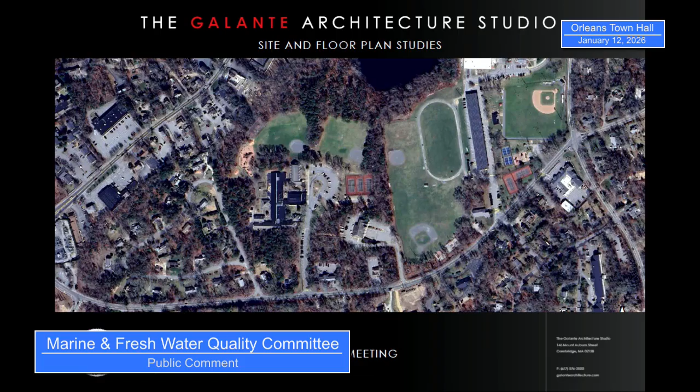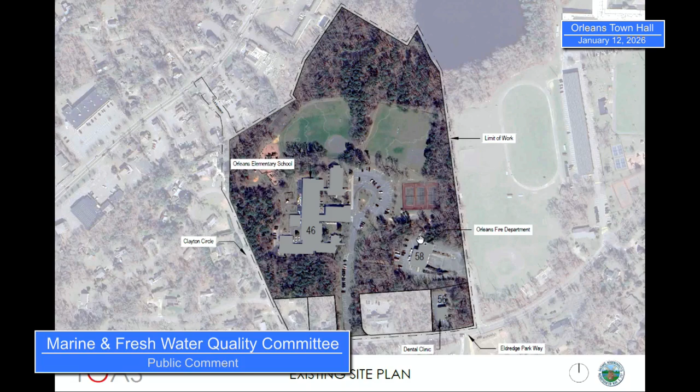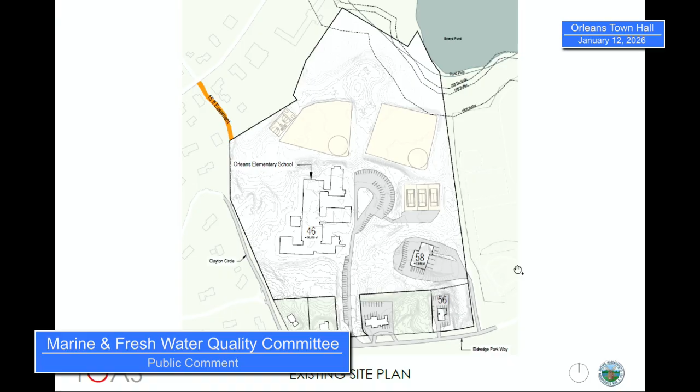So we know that the site plan encompasses this area, right? The former dental practice is here, the fire rescue facility is here, and the rest of the site is school related. Here it is in the abstract with the 56 Eldredge Parkway, 58 back here. And this access road nudges off the site slightly.

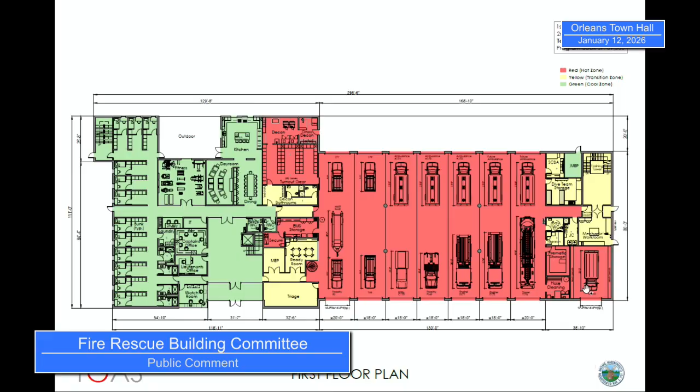So the building size we're working with is what was established during the feasibility study - it's roughly 40,000 square feet of building that we need. And so you see that there's a 3-story option. You're going to see a couple of 3-story, I wouldn't even call them options, 3-story studies and 2-story studies. So this is 3-story study number 1.

This is set back from the road a fair amount, which is what we need to get fire trucks off of Eldredge Parkway safely so they can come in or out, to turn around, to get back into their building safely.

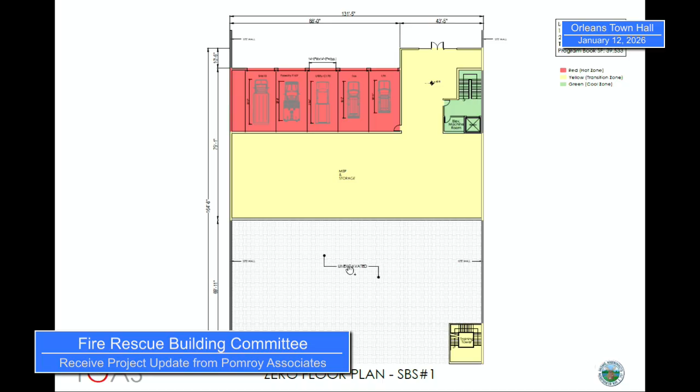This is unexcavated because it is, and this is the training tower. This unexcavated is below the apparatus vehicles that are in here that are necessary to get out toward Eldredge Parkway this way. The red zone is all what's known as the hot zone.

Yellow is the transition where we have to have a mechanical buffer between the green zone and the red zone. The green zone is living quarters, and to make a fire station healthy for firefighters so that they can have nice, healthy, long lives, we create a green zone, transition zone, and a hot zone.

So living quarters, entrance to the building is here off of this bridge concept, and then living quarters would all be in the green zone. There's some transition spaces in between, and then the red zone. Second floor would all be office, command staff, training, etc., all up on the upper level.

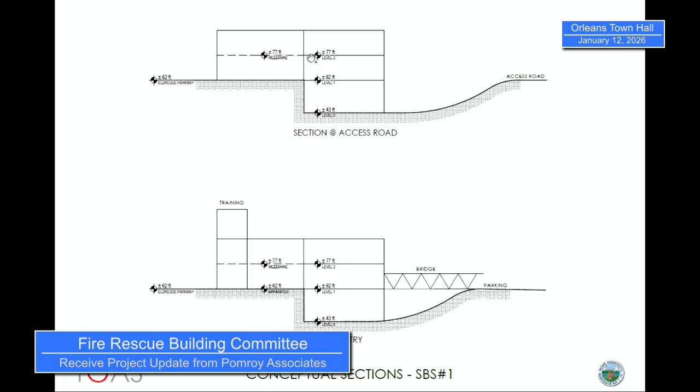So conceptually, parking is here. The building, the property dips down to here, and so we have level 0 down low. Level 1, Eldredge is roughly this elevation at 62, and then the second floor is up here. And then we need to get across that thing.

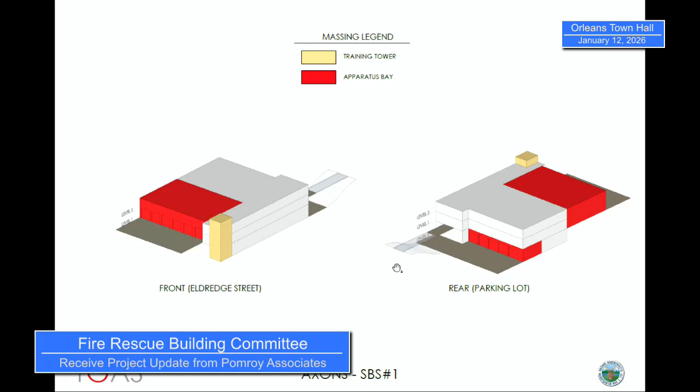So this is one site study. You understand that the building massing is conceptual because we're working on site studies mostly. This is facing Eldredge. This is facing the parking. That's the bottom, level 0. This is level 1. And then the living quarters is up above that with a little bridge in between. So that was one study, and we can go back and revisit these.

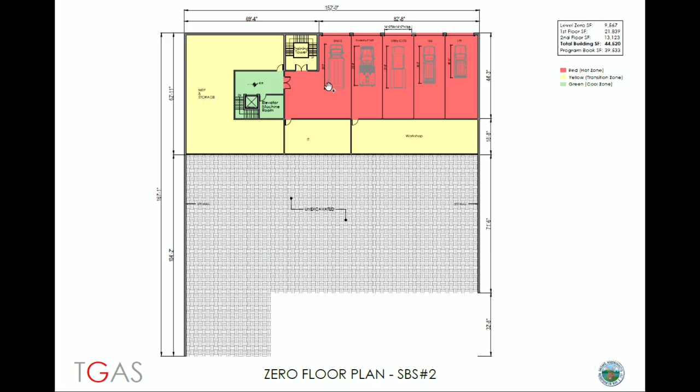Level 0, same thing, down low. Training towers in the back of the building. There's the training tower, living quarters on the first floor, entrance on the first floor, and the red zone, the hot zone where vehicles can go out onto Eldredge, frontline vehicles. Second floor is all living quarters, office space up above.

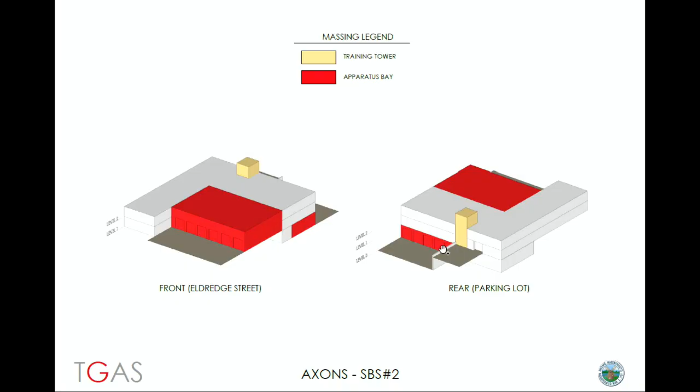The massing starts to look something like this. On Eldredge we see apparatus bays, 6 bays, 2 levels. In the rear, the building is kind of bifurcated with a retaining wall, entrance here, training next to it, and a lower level where second line vehicles are.

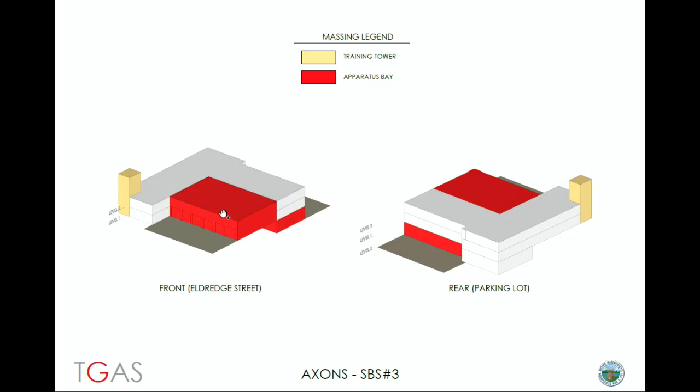3-story number 3. Similar concept to what you just saw: training tower in the front, vehicles facing Eldredge, a set of vehicles here that turn around and head out that way, and the construction entrance with the same kind of ramping system. Lower level, very similar. Upper level, very similar. The second floor is along the back of the building, not the front, so the massing would be a little different with the second floor along the rear.

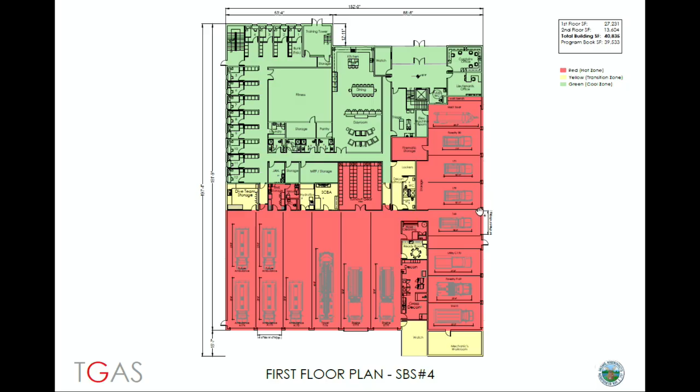Second floor is all of the office space back in this area. And I'm not sure if I said it on the previous one, but the training tower's up on that side at the rear of the building.

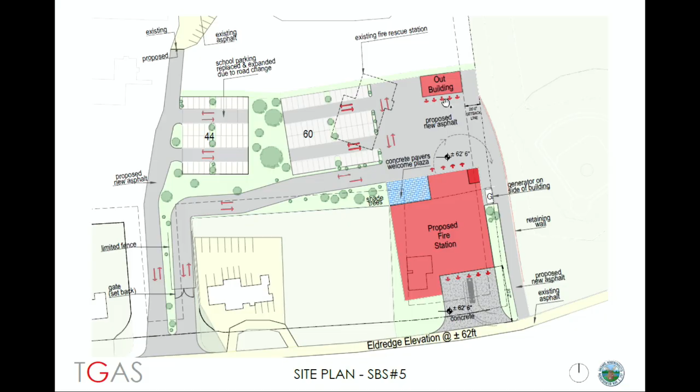There's a training tower in the back. There are some bays back here that are at the same level, level 1. We're also leveling the whole site in this scenario. We can drive our vehicles out that way or out that way. Construction entrance on that side, parking in the back, outbuilding for other vehicles.

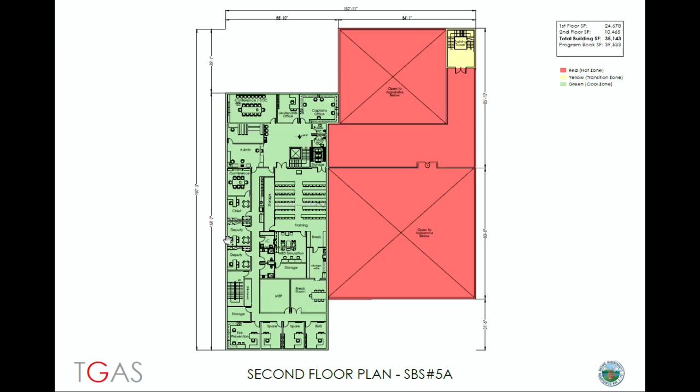Second line vehicles back here on these bays, training tower in that corner, and then office space up on this side with a mezzanine over to a training tower.

This is an alternate with the same first floor plan, but the offices at the rear of the building as opposed to coming along the side of the building here.

Those are some of the things that we're working on with Tim Gula and Chief Daring, thinking those things through, making sure we have the function working out properly, and I think we're in good shape as that unfolds.

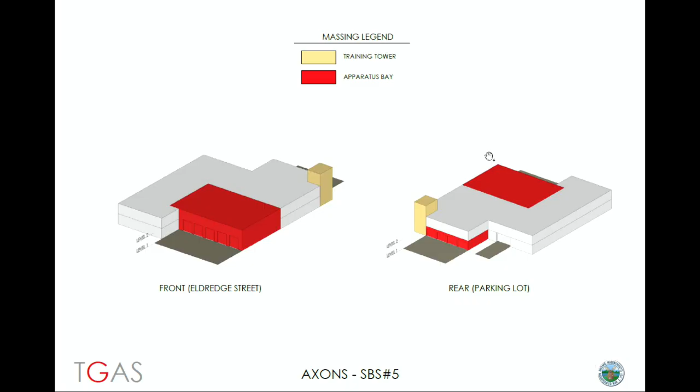This is what the building starts to look like with the massing, not the building, but bays across the front, the access road that way, and then bays in the back over here. This is the access roads on that side to that area.

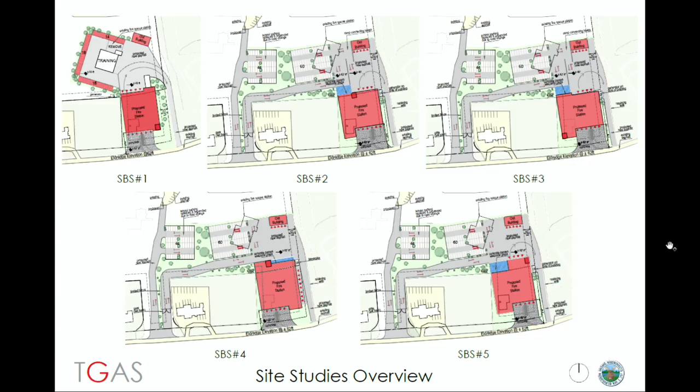That I'm going to open for discussion at this point. Quick question.

I'm just thinking, without looking at all the stuff happening in the rear of the building, right, how tight the site is, yeah, all of the different things that you have here.

The first thing that comes to my mind is if we can't run new sewer along Eldredge, we either have to use that easement out the back or do a septic. There's some land up in there - it might be harder to see on these slides, but right now the building is here and the fire department is using land up into the back here a little bit. So there is some space back in this area that is not settled. But I think utilities will have an impact once we start to get direction and land on a site plan.

So Ted, with the concepts that more or less create a level site, have you given thought to maintaining and using the existing fire rescue building and access? Yes.

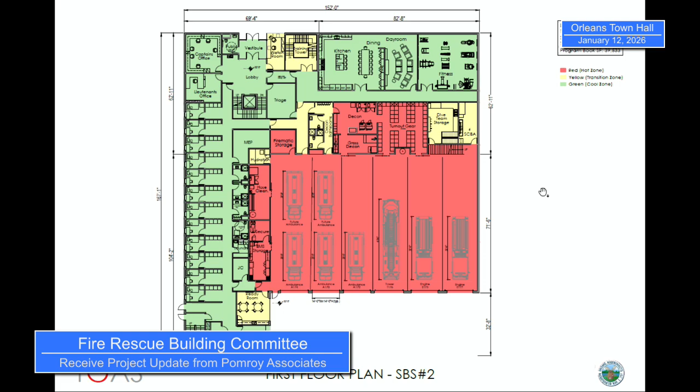Mark? Ted, if you just go back to where you show that one, that's fine.

The access road for construction, and then with the potential of going back to whatever changes are made for that access road for construction, we could go back to the existing roadway and layout for the elementary school when the construction was completed. One of the thoughts I had was that we can probably anticipate some construction work needs to be done on the elementary school in the future - we've talked about the roof, we've talked about other things. So I think this affords us an opportunity to have those discussions later on down the road in terms of the access road going away and going back to what exists there now, or maybe making it a lot easier to do work on the elementary school in the future. So I think just to keep it in the back of our minds that a couple years down the road, this may be beneficial to all involved.

And I was one of the people that brought up the potential reuse of the old, existing station. Whether that is economically viable or not, I know a lot of times when you try and retrofit a building, it's cheaper to start with something new. And I don't know, again, we're here to talk about getting the fire station to be as good as it can possibly be for the town of Orleans.

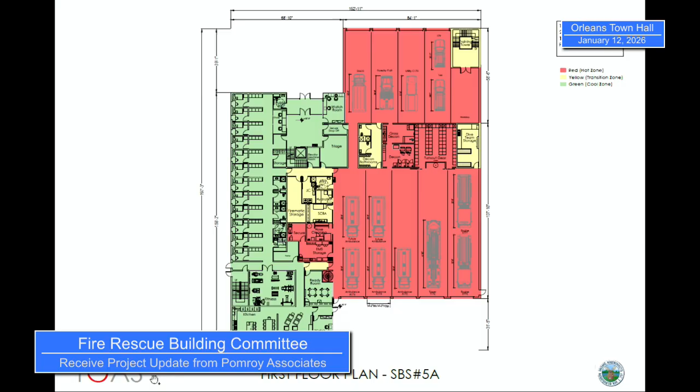We sort of are, I think, forced into that. It's high on the list here, then I think we can work this around. I mean, there's obviously things we can do to enhance that.

I think that's one piece that talks to a two-level building as well, because I think it'll be easier to have a two-level building with easier flat access, so that driving around the back when someone's having some problem and looking at two different heights, a door down low, a door up high, it's going to add some confusion. I feel that the department has suffered enough given where they are. Agreed. From a site engineering perspective, I think a two-level building makes all the sense in the world.

So we've obviously heard from Rick, from your team, from the chief. Are you looking for direction from us this evening, to focus in that direction, given the timeframe that we're up against?

Well, I'm throwing it out there. I'm looking at Rick because he's the schedule guy, but I think the answer is yes, if we can get direction. I think there's two items that I think we would like to move off of. One is the reuse of the existing building, I think if we can get our focus away from that, that would be great. The other is...

going to a two-story building on a flat site. I think how the building lays out there is still to be discussed, but it gives the architect and their team a lot more freedom to start getting a little bit more creative with it, knowing that we're not dealing with 5 different versions, just one.

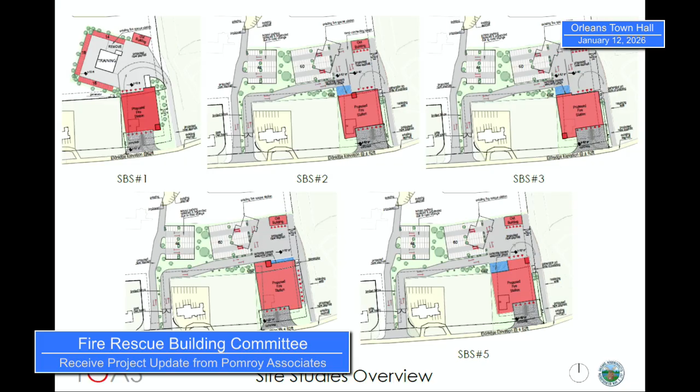Do I have a second? I'll second for discussion. Okay, it's been moved and seconded. Any discussion, Rick, Ted? Questions regarding what the motion stated?

Yeah, just one, we're in discussion. We're going to suspend the planned use of the existing facility, correct? And options 2 and 5 exclude that, so.

It sounds like everybody's comfortable with us, of course we'll be working with the schools and the town, but comfortable with us at least using the school side entrance during construction, if not for something permanently down the road. We'd like to continue exploring that and see what we can come up with to be creative.

I think we need to have that discussion with the school people. Amend the motion to include the fact that we're no longer considering reuse of the existing fire station building. You got all that, Laura? Thank you.

Any other comments or questions? Want a second on that amendment? Second. We have a second on the amendment. Thank you, Mark. Okay, all those in favor, let's do a roll call vote, starting with the chief, please.

Aye, Jeff Deering. Aye, Rich Waldo. Aye, Peter Canadian. Aye, Rich Chiampaglia. Aye, David Little. Aye, Mark Matheson. Aye, Kathy McNamara. Aye, Emily Miller. Aye, Mark Reel.

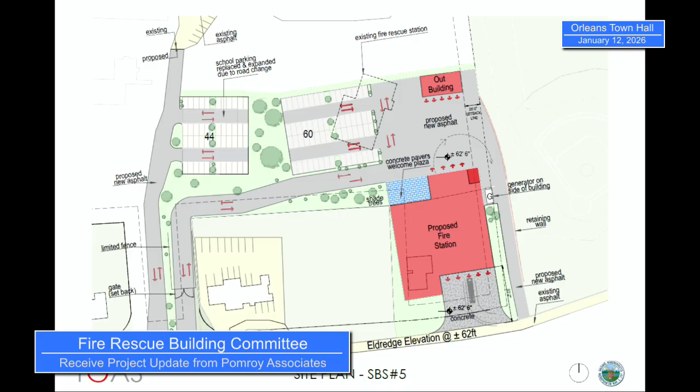Rick, are they going to be doing soil borings at the same time? Do we know? No soil samples with the surveying team. We will schedule - we're not going to do geotech borings until we know exactly where we're going to put the building. We could do some test pits if we could coordinate that with your equipment, that may be beneficial, but right now we're gaining the elevation grades, and once we have a better idea as to where our septic system's gonna go, where our building's gonna go, we'll want to do geotech and test pits.

Let's keep it open for the septic system - whether it's a septic system or sewer connection, so we'll keep that. Obviously, being able to evaluate a sewer connection is helpful to know what that bottom floor elevation's gonna be, so whether it's gonna be a 1-story or a 2-story. Is it better, higher for you? Of course it is. It certainly helps. I asked that as a question, but for sure there's a lot of other pieces to the sewer connection that need to be analyzed and evaluated.

I think the other thing with the surveyor is, just because you're going to be changing that front entrance and siting the building right on the front entrance, sight distance is going to be important, particularly on that right side there, to make sure these guys are going to be able to see. So when they do the survey, that they're cognizant to get any potential obstructions that might be outside of the site that might be useful in determining sight distance and stuff like that.